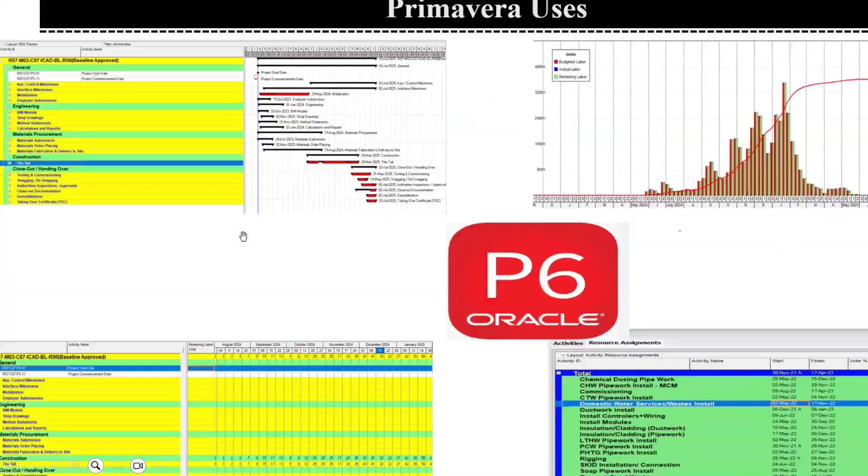Yes, how? For example, you can see this is our Primavera screenshot. Here you can see all the project breakdowns: engineering-wise, material-wise and construction-wise. And this is the month, this is our peak curve per week, how much percentage you have to achieve. These are our peak curves.

And you can see this is the man hours. So per day how much manpower we need. For November how much manpower we need, for October how much manpower. All these, 25, 29, the manpower we need on these days, will be shown here.

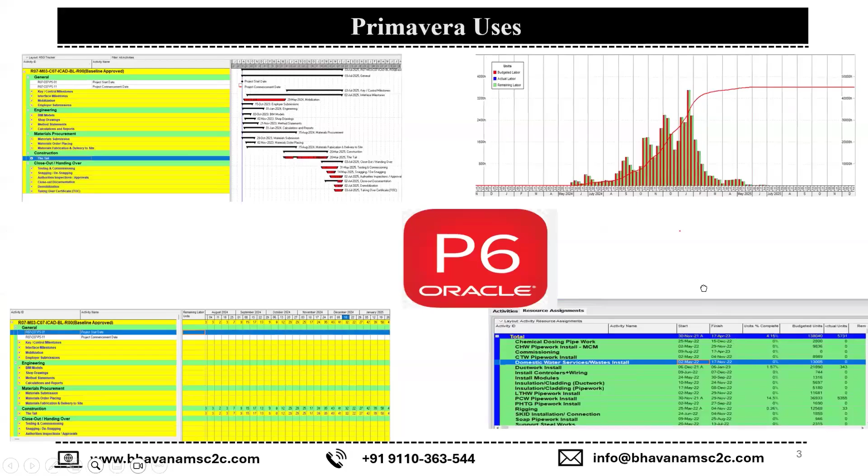And if you see, this is the material quantity. I told you, right? These quantities will be extracted from the BIM. For the chemical dosing pipe work, we need this 2800 running meters. And for the domestic water supply line, we have to do 13,005 running meters. All these quantities we can extract from the BIM and import into Primavera easily. We don't need to break our mind in this area.

If you don't have quantities from BIM, you can approach the quantity surveyors in the project. They will support you and give you the quantities for each and every line item of the activities, and you can import it. So from this Primavera, whatever details you want, minute-wise, hour-wise, day-wise, week-wise, month-wise, year-wise, you can extract the data.

For example, in your company, your management asks, Kabilan, if you don't mind, can you please tell me which month we need the painters for this project, and how many people you want in the month? After receiving the instruction, I will not break my mind. Okay, no problem. I will open my Primavera and see when my painting work starts. Maybe it will start in September and be complete in December.

Then I will say, sir, our work starts in the month of September. So for the initial kickoff, I need five painters and five helpers for the first month. The next month I need 10.

Then I will give the detailed schedule, extract it from Primavera, cut it, and paste it in the Excel sheet, and submit it to my management, so they will arrange the manpower accordingly.

So these are all the roles and responsibilities. As a planning engineer, we have to arrange the engineers, laborers, everybody who is required for this project, on correct time. We have to arrange these things for our project.

As a planning engineer, our roles and responsibilities include making arrangements for all construction materials, managing the cost in the project, using the cranes in the project, and arranging the machineries in the project.

It is also our responsibility to show the progress to our client, because we are all working for others, so we have to show the progress to our company MD or GM or project manager, or high level people sitting in the US or UK. If they are monitoring the project from there, we have to explain how the project is going on, so that it will be helpful.

As a planning engineer, we have to communicate with the BIM team, the procurement team, engineering team, manpower supply team, safety team, construction team, testing and commissioning team, client, contractors, and subcontractors.

As a planner, think that you are the head of your family. If any function is happening in your home, like your marriage or your daughter's or brother's marriage, how will you be involved in all the activities, how will you take charge of all the activities, and how will you monitor it? Same as planning engineers, we are the head in the project.

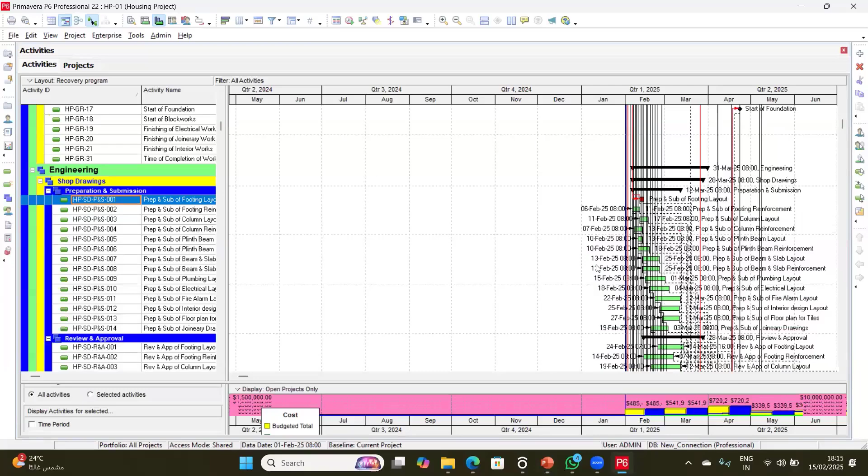Okay, so I will show some of the examples in Primavera. This is one of my planning software examples, from one of my Primavera classes which my student took.

You can see all the approvals we have to take from the government authorities, and this many drawings we need for this project, and this many materials we need - like concrete approval, steel, the material, paint, tiles, doors, windows, ventilators, everything.

And we need the materials purchase orders, material delivery - these are the construction activities. And all these activities lead to project finish. The project start is from here - the first of February 25 the project started, and the 21st of October the project finished.

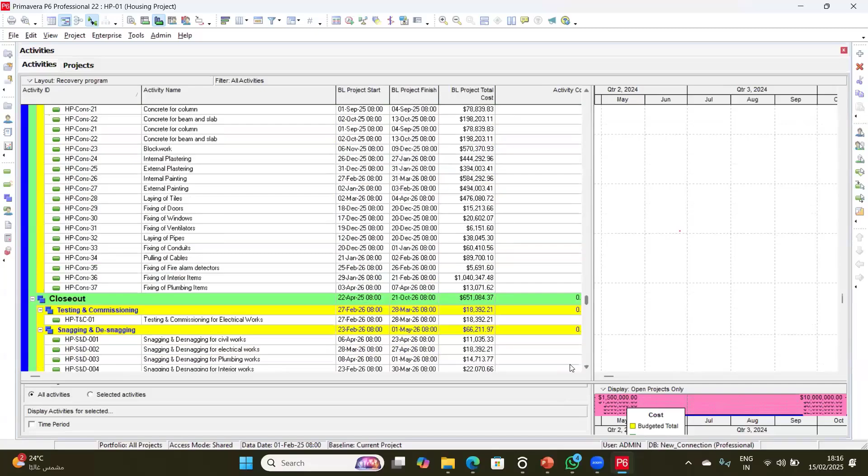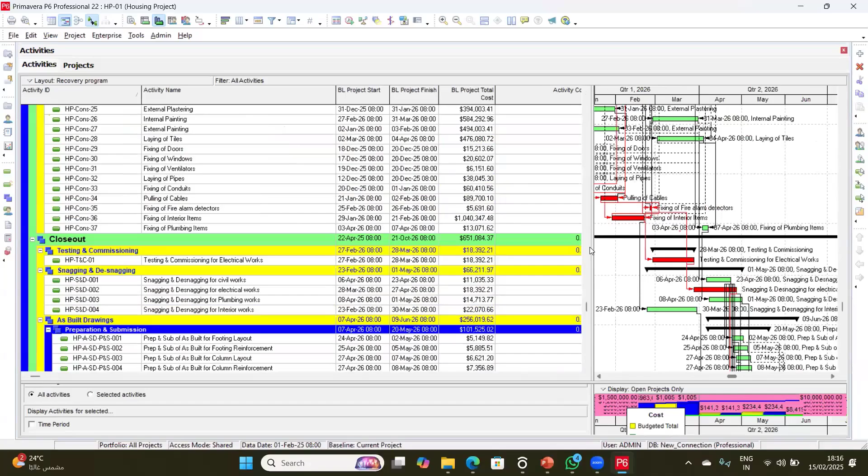This is the detailed activity. You can see the schedules here. So you can also prepare this type of Gantt charts to know when the project is going on.

So I told you in terms of cost-wise we can see how the project is going on - yes, I will show you here. If you see, these are the materials which are all available in this project, and I extracted this from the BIM and imported it here. For example,

in this project, if you need the reinforcement wise - okay, reinforcement wise, see, per week, so now this is month wise. If I need the day wise, I can change this into day wise. If I'm going to change it into day wise and apply here, you can see - now you can see here.

So per day, how much metric ton of steel we need to use - it will reflect for us. So in a minute I will check this filter, units, filter options, anything. Yes, it was divided by 300. Okay, apply. Yes. One minute.

Every day we need to use like 2 metric tons of steel. We need to work on an everyday basis, and here we need more quantities. If you want the steel shuttering wise, day wise, you need like 40 square meter per day, 45 square meter per day.

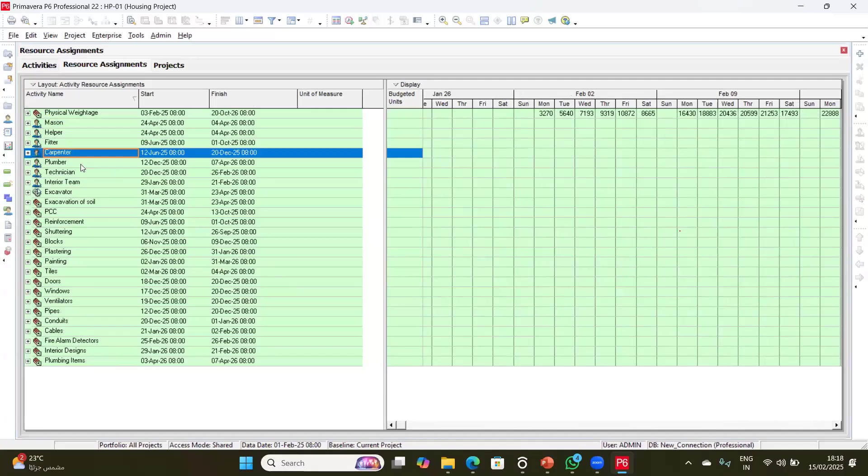And if you want the cost, you can see the cost here. This is the overall project cost, and this is the project cost per day. We have to achieve this much cost in the project. In terms of manpower - mason, helper, fitter, carpenter, plumber, technician, interior work designs, excavator, machinery wise - everything we are able to see from this graph.

If you want to see the graphs, you can see the graphs from here. For example, if you want to see these graphs, see, these graphs will show how this project is going on and how it is progressing.

You can see the graphs from here, and you can extract this quantity from Primavera to Excel, and you can do whatever integrations or analysis you want.

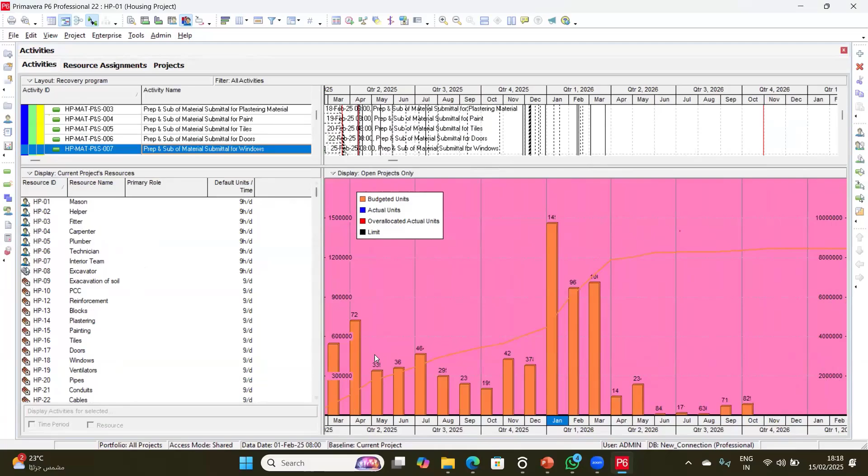Based on these extractions, we did some S curves. You can see this is our project S curve. These quantities are extracted, and all the S curves are prepared from this.

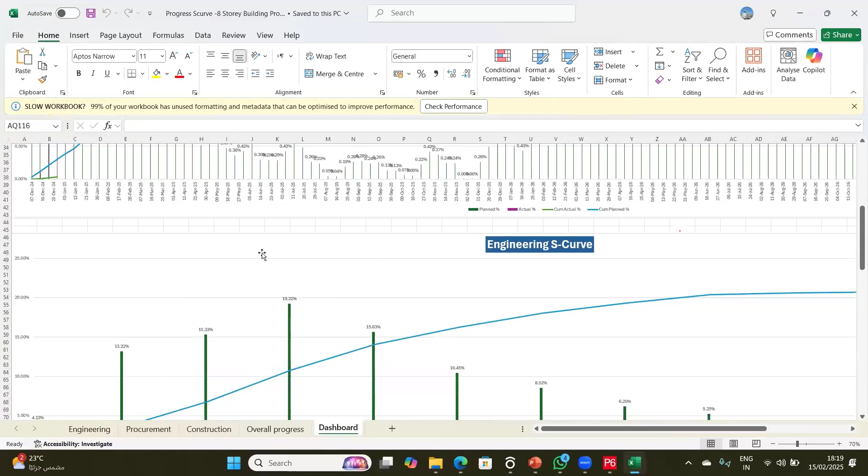You can see these dashboards, prepared from our Primavera S curves. We daily see day wise how much percentage we have to achieve. Everything you can do here - engineering wise, shop drawing wise, per month, per week, how much you have to achieve, and in procurement, construction per day, how much percentage you can achieve. Everything you can extract from here.

Here, this will be a planned versus actual curve. This is the planned cost, and this is the planned percentage. This is actual. Everything will be taught in this Primavera detailed classes, so you can understand from where we started.

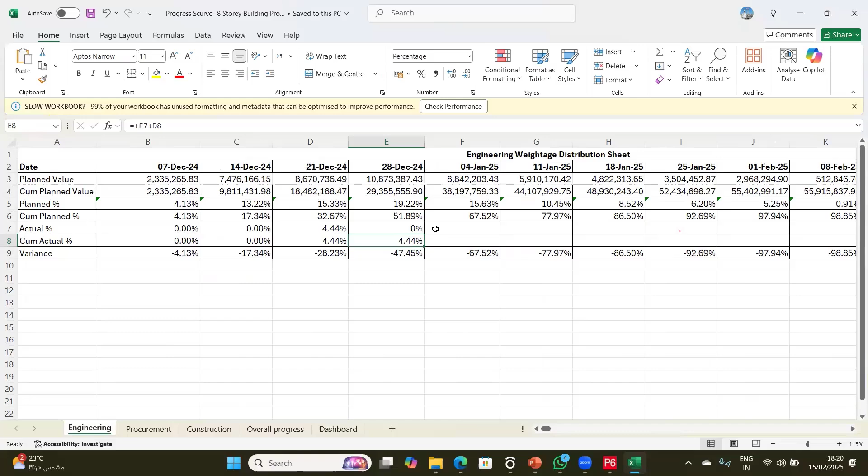So if you are doing this... okay, okay, no problem.

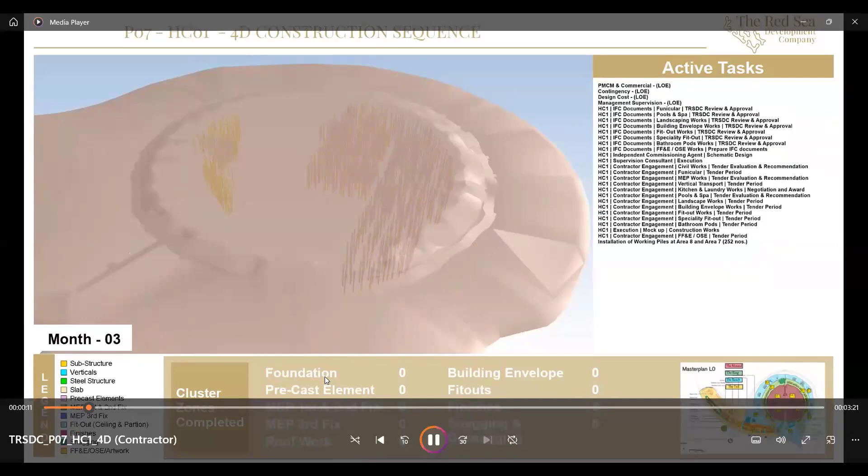This is my project, just like a 3 minute video. You can see this is the output of your BIM and your Primavera P6, Navisworks, Synchro 4D, BIM. Everything is integrated. This is the output for you. See this video fully. You can understand how this project is going on. On the right side you can see the activities are going, the contractor engagement, all these things.

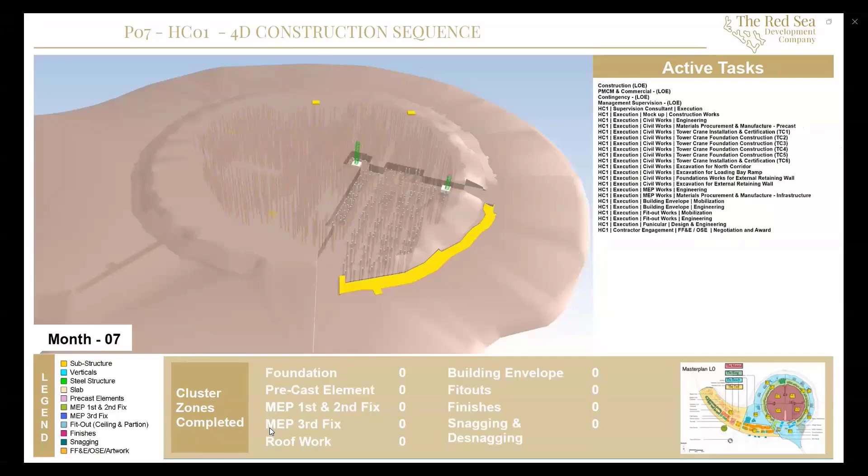So parallelly they are going. Here the work is also going. So the piling work was completed now. So next month they are going to start the tower crane erections. Yeah, they erected the tower cranes, and they started the works in parallel in these areas, and now it is going.

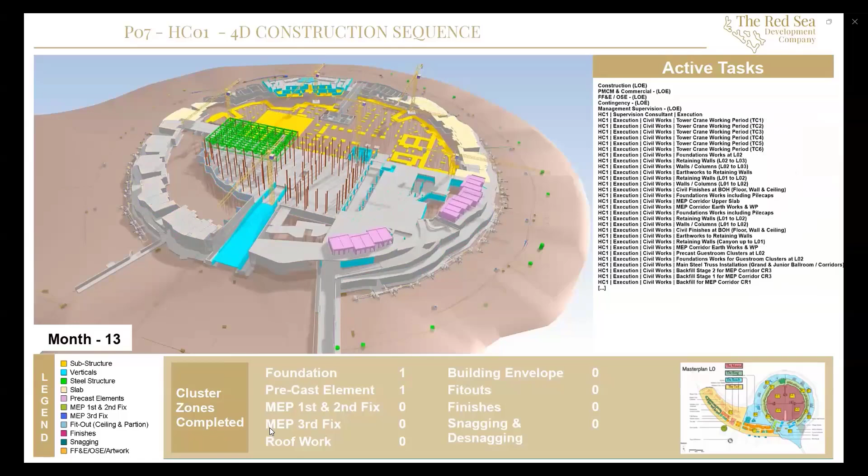This is the current project I am working on in Saudi Arabia. These are the steel structures, all these are steel structures. All those things will be imported from AutoCAD and Revit and Navisworks. Day to day, we are watching these videos, and if we have any doubts, we take it from this reference and solve these issues. Because of this, we are saving much time as well as cost and rework. So this is the one. Floor-wise it is getting increased.

On the right side, you can see the civil works, the works are going continuously on the screen. You can see text-wise the primary activities are going.

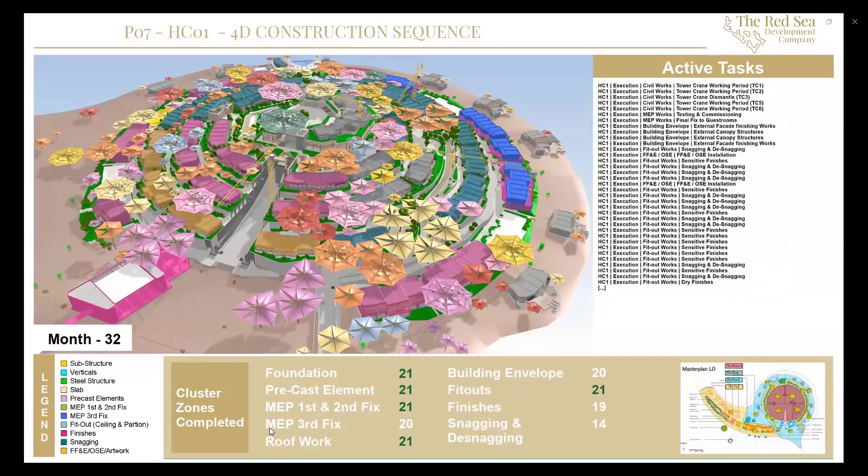So the project is in the end stage. Now 32 months are gone. You can see the timeline also, month-wise, and the snagging and desnagging, final. So when you are completing the softwares, you can do the same as well.

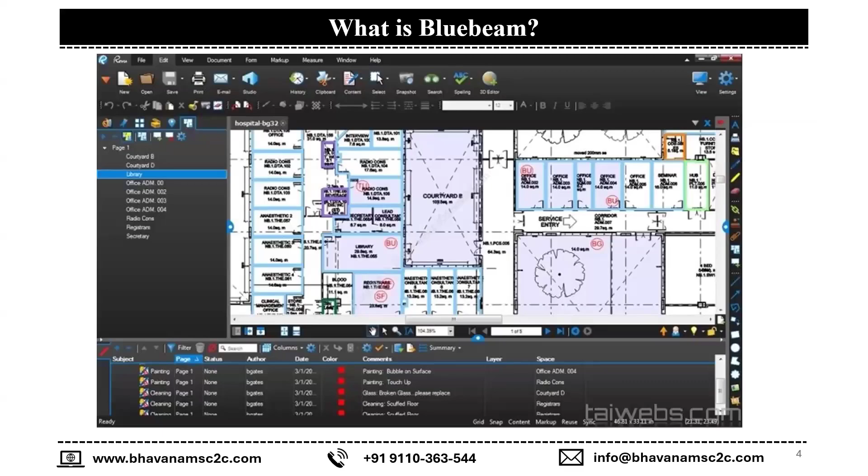Key uses are reviewing and marking up PDF documents, collaborative workflow, real-time commenting, and document management and tracking. So Bluebeam is that effective. It's not that clear an image, but I do have the software, so I'll show you there. It is an older version here, but you can see we have a lot of tools in Bluebeam. Let me go back to my Bluebeam screen. Are you able to see it? Yes, sir. Okay, cool.

So this is the latest software that I have downloaded, and this is the interface. I'll quickly give you a brief about the interface, I will not go deep. Here you have the Review option, and here you have different profiles for whatever you want to do. If I change the profile, it will change accordingly. Whenever someone makes a comment, we have tools to manage those comments.

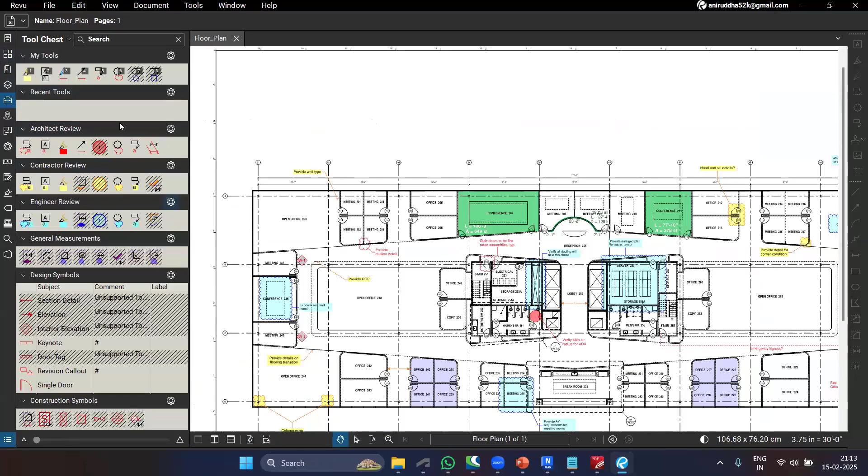These are the tool chest. We will be using these many times to do the markups or comments. If I want to do some revision or add some clouds, and some organizations have their own standards, you can add those standards here. So each time you don't need to draw a rectangle.

For example, if I draw it, I can save it to my tools, so that I can use it efficiently whenever I want. Okay, that is one of the uses. But more or less you will be able to create details also here. Okay, so you can see the section.

If I want to cut a section, maybe I forget to mark it here and it is not showing in the drawing, we can add it right here. Okay, so that also we can do. We can add so many symbols and everything. That is all about the comments.

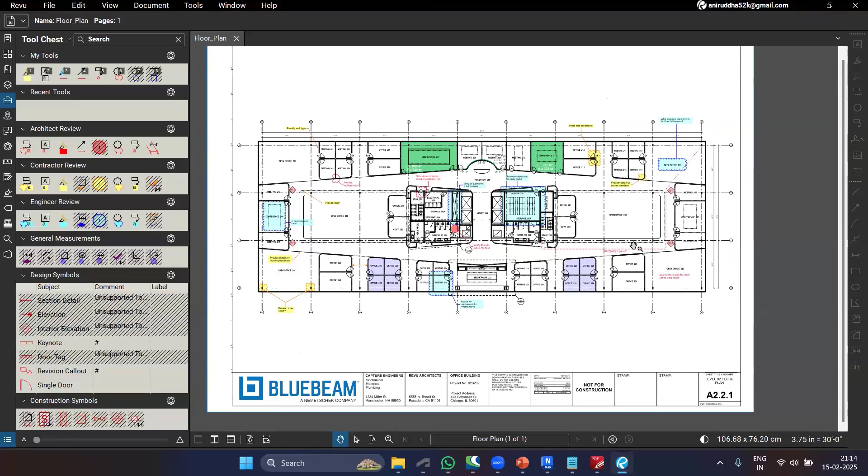Okay, but one more thing we do have here, that is this Bluebeam Studio. I didn't work with so many tools. Bluebeam is the tool that in my company we are using, and we do have this option there. So whenever we are going to submit the drawings, and let's suppose we are doing IDC or IDR, that is internal document checkup or markup, that time we will definitely use this software.

So all other disciplines will come together and start commenting on it. And how they are doing it is by using Bluebeam Studio. That is where we are using actual BIM. So you are doing some collaboration with all other people, with all other disciplines. What BIM is, it's a collaborative process which we do with all other disciplines to efficiently manage the project workflow. Okay, so it's a basic term.

So this is, I think, the key use of Bluebeam when it comes to markup. Before that, we do have other PDF tools. You can comment there, but it's not collaborative. Let's suppose I save this PDF and give it to someone else. That will not work because everyone has to see who commented. So we have so many tools to see here who did the comment, how and when he did the comment, and what the comment is.

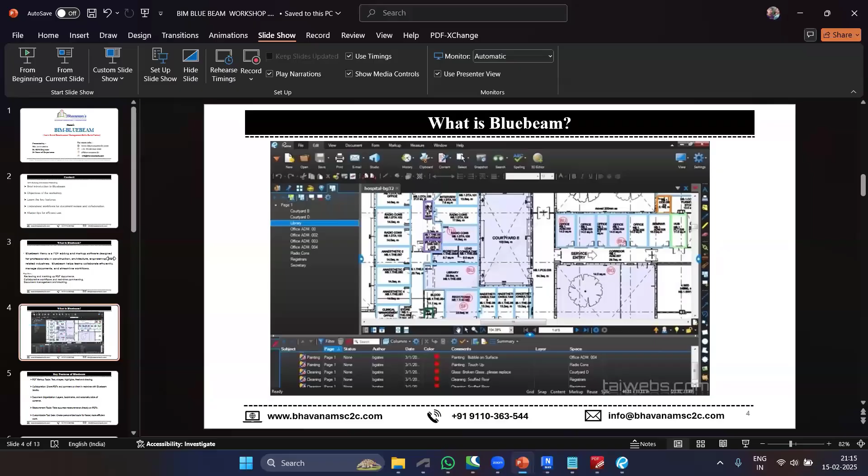So that is the thing that Bluebeam specifically has for people like us who are using BIM to do this process. Okay. So yeah, that is the basic interface of Bluebeam. So now you understand what Bluebeam is. It's not just any other tool that we are going to use in our industry. It's a very specifically designed tool to do our work more efficiently and more collaboratively. Okay, cool. I think it should be clear.

Now let's go to some key features. So I have shown you the PDF markup tools. We have a lot of tools, and it's not just limited. We can create our own markups, or we can create our text, shapes, whatever we want using these PDF markup tools that I have shown you in Bluebeam.

Then we can do the collaboration: we can share and comment on the PDF in real time. This is very important work when it comes to real time. That means we are doing some collaboration. If you guys are aware of Revit, there also we work in real time, like we collaborate at the same time while we are working. There is the option to sync and so many things. When you start to learn this software, you will definitely see it.

Then you have document organization: layers, bookmarks, automatic table of contents, and so many things. That is also there. So here you have this bookmark option. You can add any bookmark, and whenever you come back and you forget, when you click on that bookmark, it will take you there.

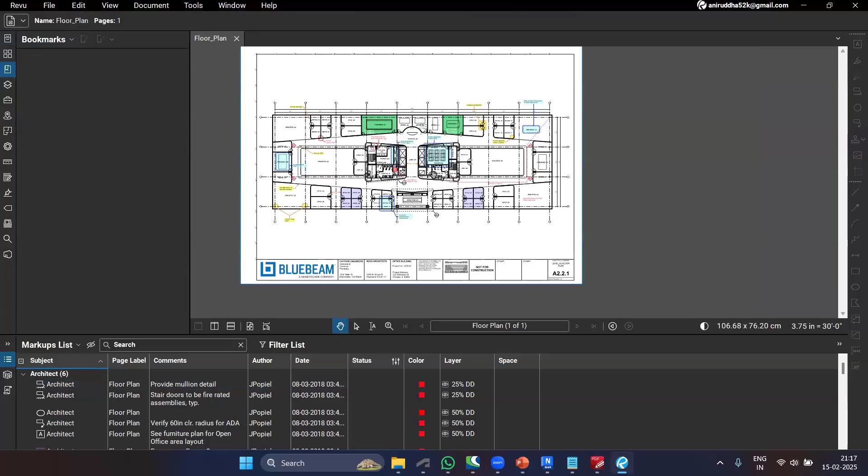So for example, this is the area. Currently I don't have this feature available right now, but for example, this is the area I have zoomed in. If I created a bookmark, maybe I'll go to the next page, or maybe I'm zooming out, but when I click back on that particular bookmark, it will be directly zoomed into that portion. That is how useful this tool is.

And one of the unique tools that I have seen when I started using Bluebeam is taking accurate measurements directly from the PDF. So, what does that mean? That means, for example, I'm not sure if that tool is working here. Protected scale.

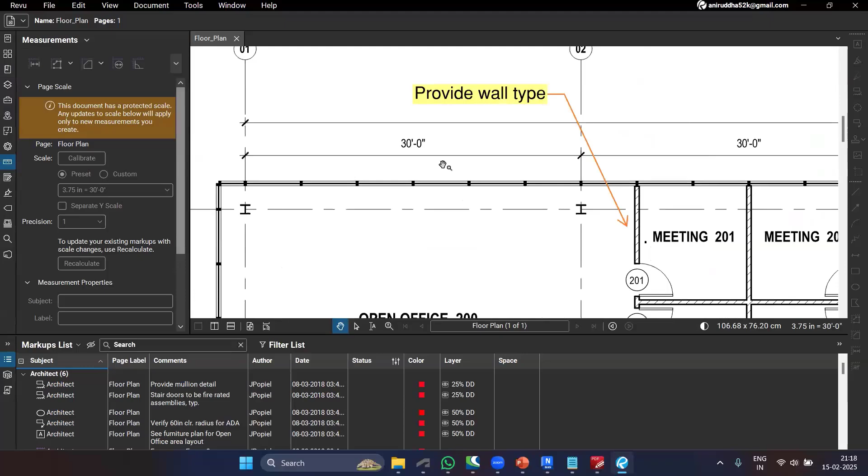Okay, I don't know, something's wrong with the document, but it is. So it is 30 feet. Well, right, we can see it. But if I want to measure some other dimension, for example, from here to here, we don't know the scale of the drawing. Let's say, I'm not sure, is it mentioned here? So even if we don't know, what we can do is click on this calibrate.

And we will select this point to this point. We'll enter this distance as 30 feet. Okay, we'll just give that command. So, for example, it's 3.75" equals 30 feet. And when I use this same tool here, it will give me the accurate length of this area or the line. Okay. So whatever lengths we have, it is fine because that should be in the drawing, right?

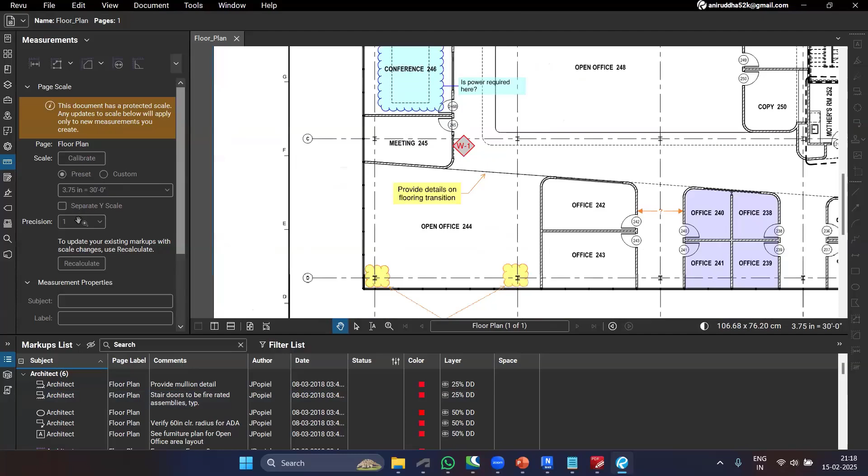But so many things are not in the drawing, for example, from here to here, we don't know. So for that also, you can use the Bluebeam software to get to know that length rather than going into the CAD or that particular software to see that length. So you can measure it directly from here. When we start the course, we'll definitely go through it very deeply, like how it works and how we will make use of it.

So this is also one of the important key features that Bluebeam has. Customizable tool set: create personalized tools for faster and more efficient work. What I have showed you is here. So this is the tool chest. You can see here, by default it has architect review, contractor review, engineer. So everyone has their own standard to review the drawing. So if I'm using this, the other guy will definitely know this comment is from the architecture discipline because it is in there.

For example, currently my company has their own profile made. So you can add a new profile or create your own, and you can save that particular profile and name it, and once you name it, it will be visible, and you can use that tool chest while working with Bluebeam. Okay, cool. All right, so that is this, and let me go to the next slide.

Sorry. All right, customization options. There we have toolbars, profile. I have just shown you the profile, how we can change the interface. So let me show you by clicking on it how we can change the interface of Bluebeam. Currently it is set at Revu. Let me take it to Revu Advanced. It will change the interface accordingly. It will take out everything and just give us this interface.

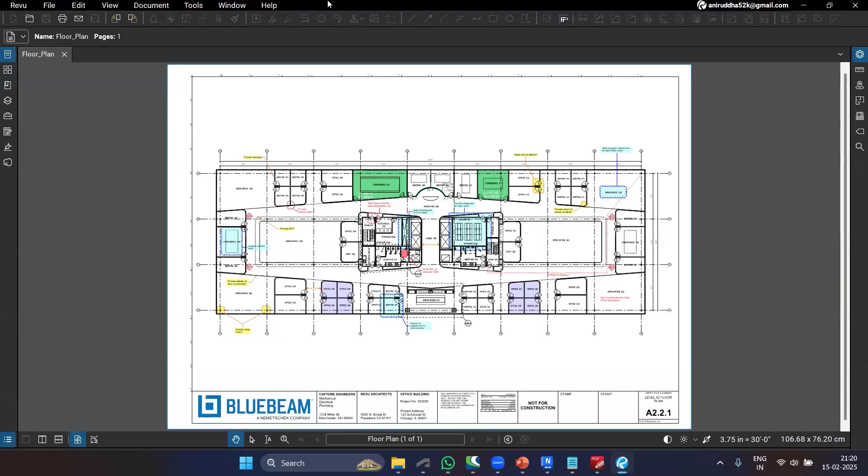You can change to whatever interface you want. Again, we come back with some new interface, and like that we can change. So this is the interesting thing we can do. For example, you are working with some organization and you are the person who oversees all the documentation work. You can standardize this, and once you standardize, every other discipline can use it to make the work efficient and standardized as per your organization.

We can create shortcuts. You can create a shortcut to speed up your work. Mostly we don't need it, but shortcuts are really important, like if I'm teaching you Revit, because when you're working you may have thousands of drawings on which you have to make comments. So each time you cannot go like this, click and then paste that particular thing.

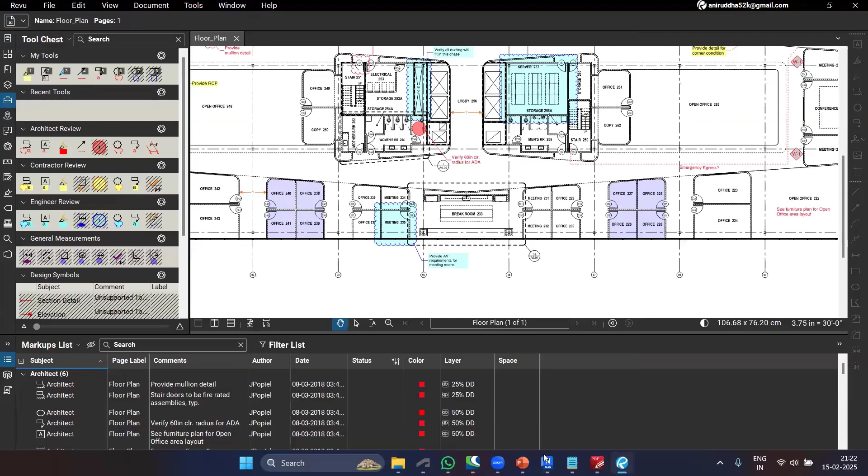So if I set up some shortcuts, from here you can select any shortcut you want. And if you use that shortcut, it will appear directly. For example, text, sorry, I don't know why it's not working, somehow I have some license issue. So you can select shortcuts you create on your own. Maybe you don't like some existing shortcut and want a customized one, so you can use all those shortcuts while working with Bluebeam.

Then you have interface tools. I have just shown you the tool chest, markup list, and properties bar. Okay.

So yeah, opening files. There are so many things you can do with Bluebeam that are next level advanced.

So for example, what does it mean by how to open multiple files? Let's see, I have a list of PDFs in my folder. Currently I have this LOI and some other things with me. If I want to use this in Bluebeam, you can see combine files in Revu, convert files in Revu. If I combine it, it will give me the combined list of all those documents. I'll not open it because it's personal, but we can open all the documents in one document and save it as that document.

Before this, maybe you guys know iLovePDF or some other online tools used to combine files or get a combined PDF. But now in Bluebeam you can do it in one click, it's just an easy task. So when you have a thousand or 200 PDFs you want to open, you can open them right away, one by one, or combine them and open it. Mostly we combine them because we have a list of drawings and we don't want to shuffle them.

For example, here is a floor plan, then here is a ceiling plan and so many other plans. I don't want to open it randomly - it should go from the floor plan to the different general arrangement plan, stuff like that. That's something we can do.

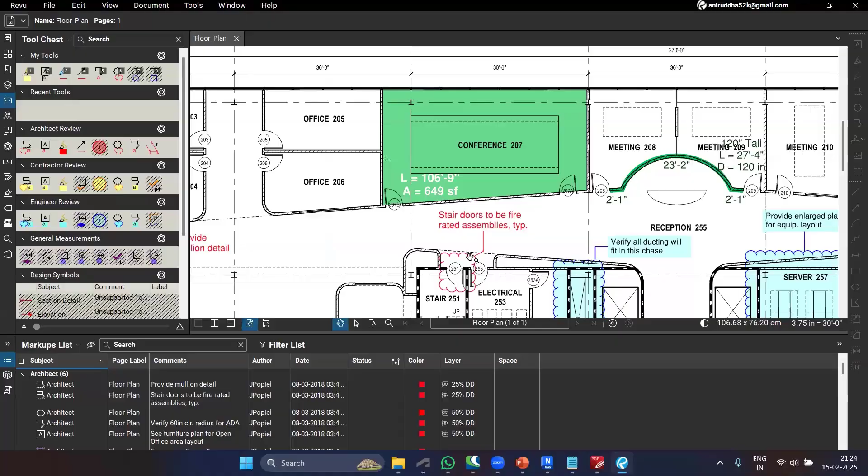So this is the markup I have shown you, already marked here. These all verify all ducting, and these are groups. Whoever commented made sure it should be in a group, so we don't mess with the comments - we have a habit of moving things apart. So if you don't want to move it, you can create it as a group.

You can do adding and removing pages - that tool isn't working for me right now, but in the document, at the end I'll definitely give you one example where you'll see how that works. And you can organize the layers and manage the visibilities, which you can do from the layers part.

Here is what Bluebeam Studio is. Bluebeam itself, if I remove the Studio part, is the PDF editing tool with a lot of features oriented to the construction industry, but it's not that useful by itself. What makes it useful is Bluebeam Studio. So how does that work?

Let's say architectural, structural, and other disciplines like landscape are working together - landscape people create their own drawing using architecture reference, structure reference, and all other references. So everyone can go there, review all the drawings, and do their own comments. It's really easy to track changes and communicate effectively.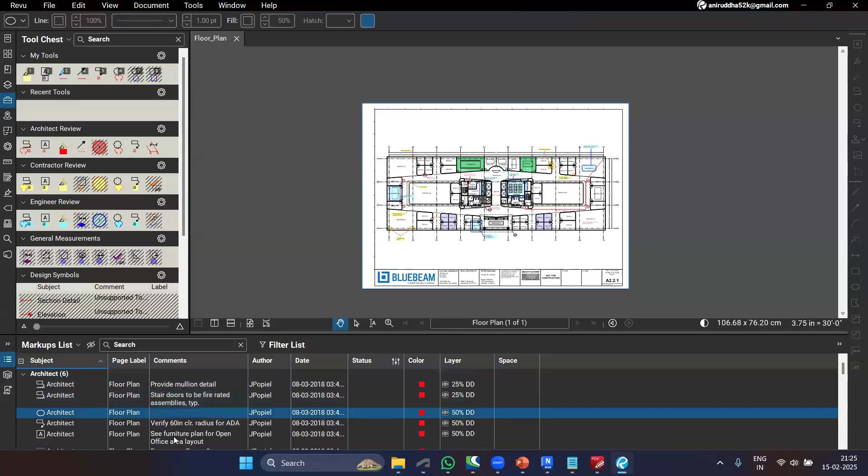You can see when someone has commented on this PDF, their name is visible, and that comment is also highlighted. You can see it's the architect, and he put some comment, or you can see it's the contractor's comment - every comment is different. You can see the discipline, the page label showing which page this drawing is on, and you can see the comment, who did it, and also the time. That's how it becomes collaborative.

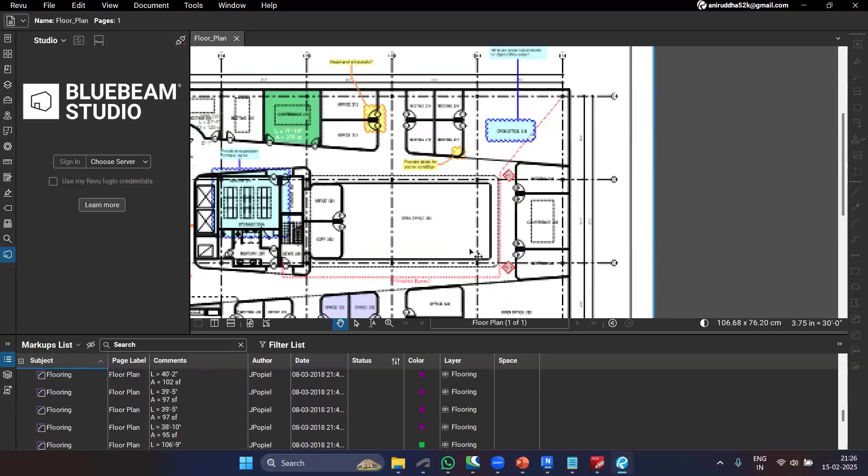For now it's offline, but you can make it online. So if I start using this, all the architects, contractors, and other engineers come together and start putting their comments. If they didn't understand something, they make sure they understand it, or if they want some changes in the drawing, they can simply do that. That's how it works.

There are sessions we can create in Bluebeam Studio, which help others join that particular session, the way we joined this Zoom meeting, and they can start doing comments on it. We can share documents with stakeholders. This is the toolbar which I've already discussed - we have batch processing, we can do calibration like I already showed you, and we can do estimating. There are so many things we can do.

Okay, so we will come to the case study. I think we can include this thing. So, one day in my organization, we had this issue.

We faced this issue. I'm not sure if you guys know the DiRoots or not. But when you're learning with this BIM thing, that time you will definitely be using it.

But let's suppose you don't have the DiRoots, so you have all the sheets with different names, because when Revit starts exporting and you try to combine it, how will it be splitting the documents into multiple sheets. That time, this Bluebeam tool is literally helpful.

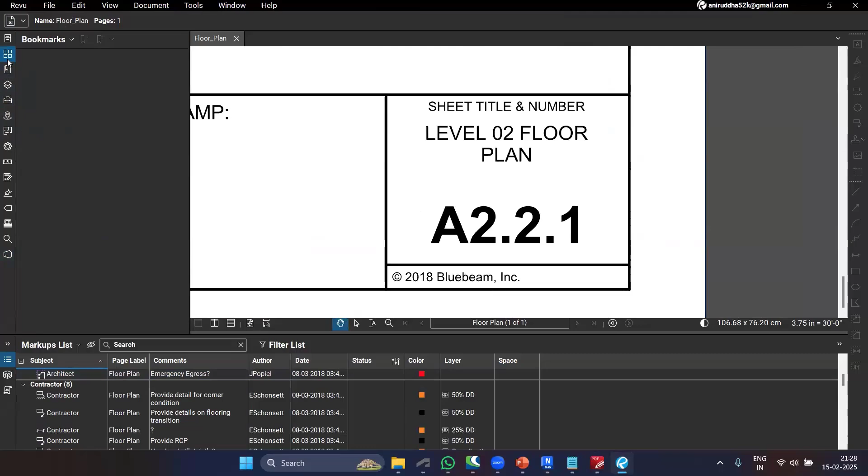So for example, I can use this as my final reference and I can add it. Let's see if I can. Okay, it's not working for me somehow. But when we start this thing, it should work.

However, if I take this as a reference, let's suppose this is changing for A2, A2.1. For the next drawing it will be 2.2, and maybe after some time it will be 3.1, 3.2, 3.3. You can't save it one by one.

If I try to do any renaming tool, it won't work because it will take a lot of time. I have thousands of sheets, it won't work. So what we did, we just used this thing, and now it is reflecting this.

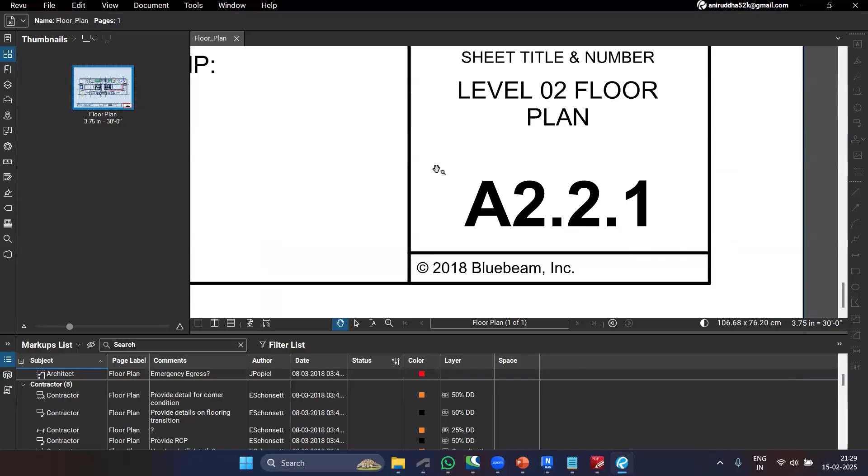We use this tool to create a page label that will appear something like this. We select the page region, select that particular thing, select it here, and it will reflect this. Let's suppose we have thousands of drawings, we don't know, but it will take this portion, read the text, and give that particular page label as a number.

And then you can see here we have an extract pages option. So what it will do is extract all the pages with their respective drawing names into a specific folder. So you can see it will save you a lot of time.

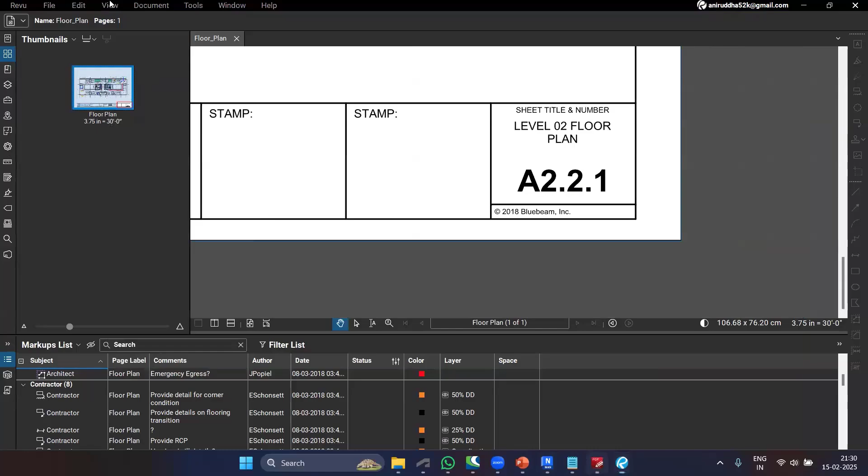You can't do it in this PDF editor, can you? I don't know, I have used it, it won't work here. Since that time, I have started using this Bluebeam tool very effectively in my organization.

So that's all about the Bluebeam related to the workspace and the tools. How does that help in BIM? It's not just a tool, it is literally helping us make our BIM workflow efficient. So, hope I have explained and given you a brief about Bluebeam. Let me know, guys, if you have any questions related to Bluebeam so we can discuss it.

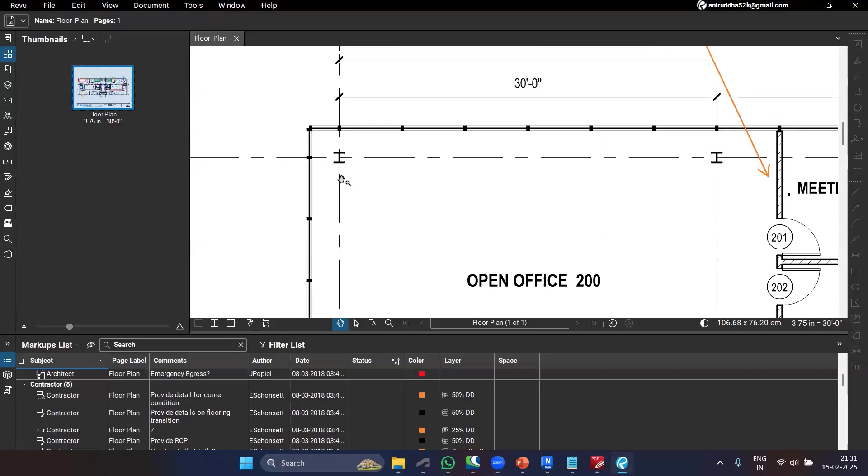No, you can't do that because it is the product. This is the final product, the particular output that you want. You can do some add-ons, but you can't change the exact plan. If I want to hide it, I have tools to make it hidden. We can do that, but it's not like you keep moving it here and there—it won't work, because that should be reflecting in your model as well. Whatever drawing is coming, I think it's an architectural drawing, and it's coming from the model. So whatever you want to reflect here should definitely reflect in the particular model from which you exported this plan. It's the model entity—you cannot just edit it here.

Thank you. Any other questions? Yeah, hi, Aniruddha, this is Kabilan here. Hey, hi Kabilan, I have one doubt. Is this Bluebeam software useful for as-built drawing preparations? We can use it for that as-built preparation.

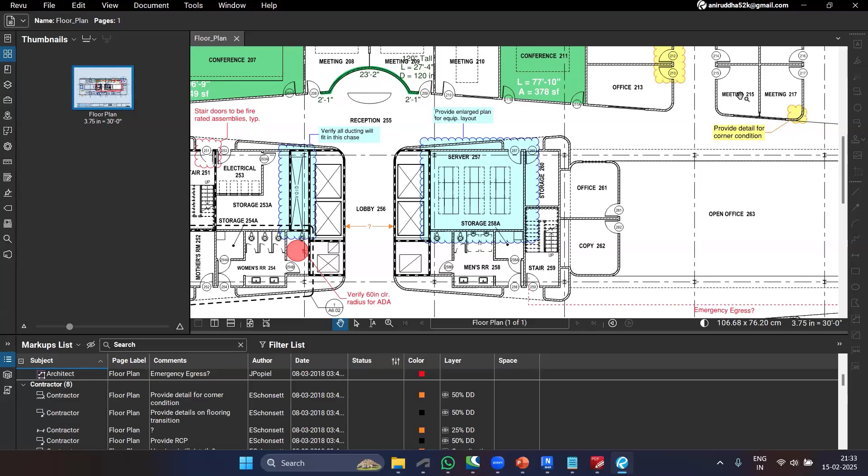As-built, like what? For example, as per the approved drawings, due to some issues with the MEP contractors we are unable to fix our detectors or our works, so at the site condition we are doing some changes. That needs to be reflected in the drawings, so when we are raising our work inspection request, they need the red line drawings. So for that purpose, can we use this software?

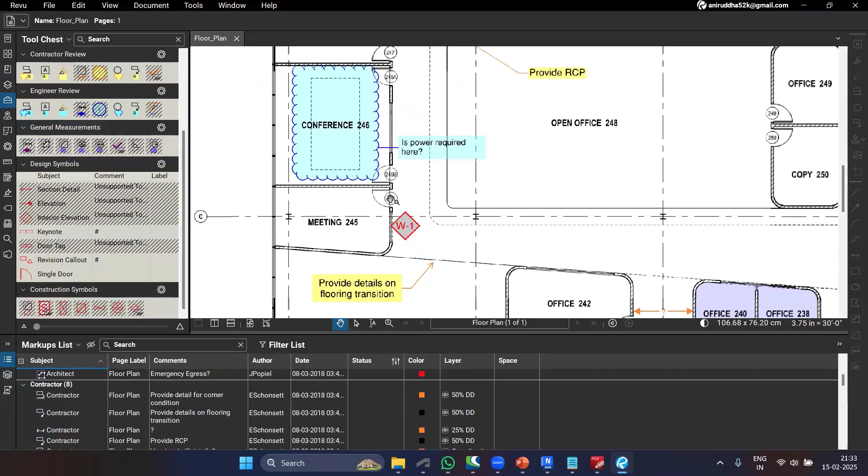Not sure how—yeah, yeah, we can definitely create the particular detail if, let's say, some detail is messed up. So this door is not correct, so we can just simply use the tool set. You can see the single door, you can add your own door, or create your own like door and a cloud symbol, you can mark it as revision one. Exactly, you can do it, but that is just for the purpose of reflecting it. At the last, it should reflect in your original model or whatever the CAD is. Yes, yes, I understand that.

So first, the first stage we definitely do have to extract it from the BIM, and we work on site. Due to some work and site conditions, something we need to change, and that change needs to be reflected in this drawing. And at the final stage, we have to hand over this drawing to the BIM guy, and again he will reflect it in the model. Yeah, perfect, perfect, that's how it works. Okay, go ahead. Okay, thank you.

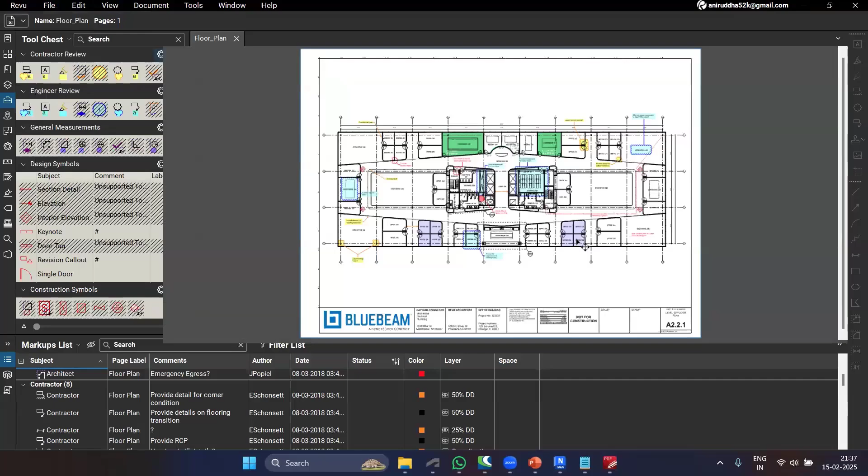Yes, we can. I didn't do it because I don't want to make extra promises, but this is the quantity takeoff, and yeah, we can do the quantity takeoff in Bluebeam. While learning, I'll definitely learn and teach you, because mostly it's a PDF editing tool. So we didn't go for the quantity takeoff. We have some extra tools for that, so we don't go with Bluebeam. In Revit also, I'm already getting a quantity takeoff, so I'm not going with Bluebeam.

Okay, so mostly we use it for the drawing comments. It's mostly arranging the drawings, managing the documentation, putting the comments, back checking the documents. For all that purpose we are using Bluebeam in my organization. But yeah, if there is an option, we can definitely do the quantity takeoff. So thank you for your question as well. It's literally an interesting question.

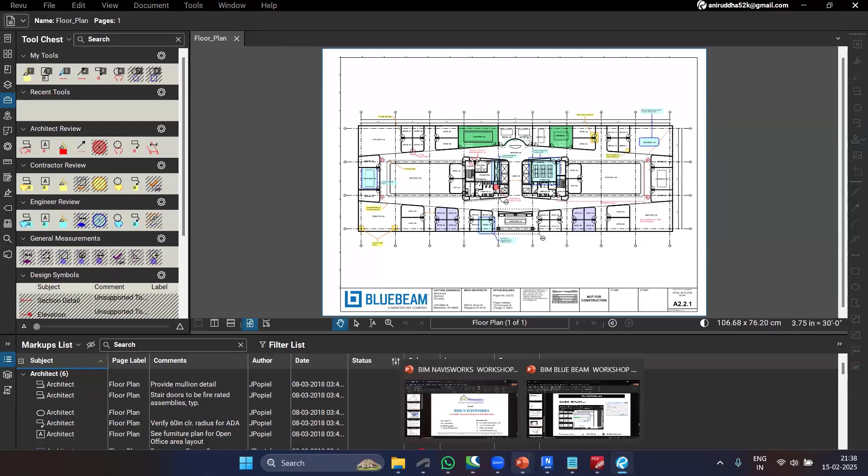Sharad. Okay, so if you guys still have any question, just put it into the chat box. I'll start with Navisworks. I think we have Kabilan with us, hopefully he's with us. He's a planning engineer as well, so he's good with this planning stuff. Okay, so let me start with Navisworks. It doesn't matter, you guys now know me, so there is no point to introduce myself again.

But again, if you see BIM with Navisworks, how beautiful that looks. So what is Navisworks Manage? First of all, again, Navisworks Manage is not BIM. I am mentioning it's a tool to make our work efficient in BIM. BIM is the process. When you are learning all the tools, you become the BIM engineer. That means when you are learning to collaborate with all of these tools, you have a whole lot of knowledge of all of these tools, and you will become the BIM engineer.

Make sure that is clear, because many times we mess up, like, this is the software, that means this is BIM. Many times I have heard people saying Revit is BIM. It's not like that. Revit is the tool we use to do the BIM process, or to implement the BIM concepts. By definition, it's a comprehensive project review software for building information modeling used in the architecture, engineering, and construction industry. Whenever you hear the term BIM, AEC will come: architecture, engineering, and construction. So it's a project review software.

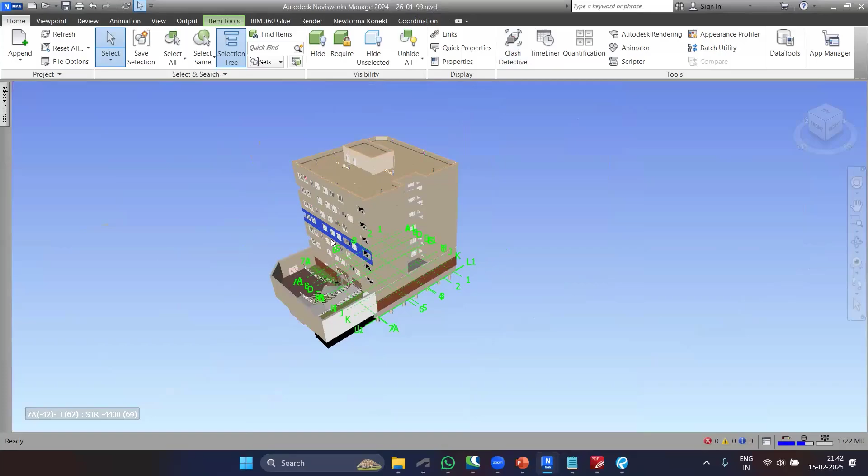Okay, so this is your model. This is the NWD file. Okay, I'll tell you what these extensions are, but for now this is the Navisworks document file. Here we didn't append any model. It's the exact model that is in the document. You have a lot of options: Home, Viewpoint, Review, Animation, View, Output, BIM 360 Glue, Render, and these are the other plugins that I have used in my recent works. Okay, so on the Home tab itself, you have a lot of options.

First, what is Navisworks famous for? Navisworks is mostly famous for clash detection; it is very good at it. So just click on it and see how that looks. So this is basically the clash detection window. Before and after that, you have to do a lot of work. There are prerequisites for Navisworks clash detection that we will definitely see in the course. But in the middle, this is the clash detection window, so you can see how you can detect the clashes.

So old, new. These are the clashes that we currently have. These are two clashes, and these are four clashes we currently didn't resolve. There are options: new, active, reviewed, approved, and resolved. You can manage those things in Navisworks itself. This is the Rules tab, where we can exclude some items, include some items, decide how you want to run that particular test, or add some new rules.

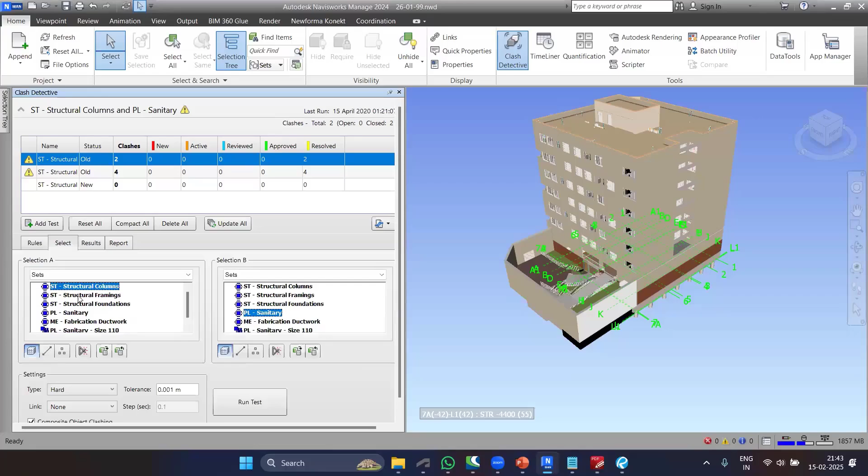Then you have a Selection window. What selection will you be doing? Maybe there are different disciplines: structure to architecture, structure to MEP, architecture to MEP, likewise landscape to architecture, or landscape to structure. We have so many disciplines, and we want to do clash detection for each discipline against the others. So you will be creating different sets. As you can see, it's related to sets. So you can select different sets.

And then you have some settings. If you want to use tolerance, you can. You can change the clash type, how it will be detected. There is also the option Link with TimeLiner, so you can choose that option. Once you did all the settings properly, you can simply run the test. Once you run the test, whatever clashes we have in the model will appear here. So that is how this clash detection works.

Okay, now the second thing Navisworks is famous for is the TimeLiner. Recently, if you noticed, Kabilan, sorry if I'm saying your name wrongly, showed how the activities and project planning go on. You can do the same thing, or do it better. You can literally link the Primavera file with Navisworks and assign all the tasks.

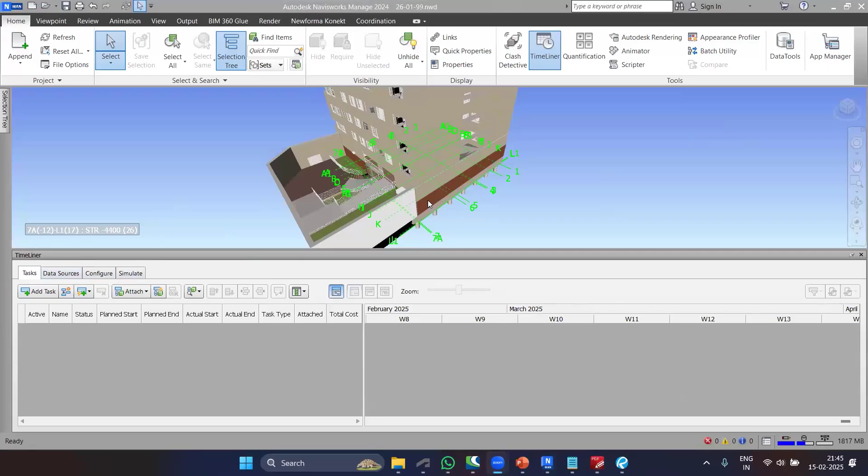So last time, if you noticed, Kabilan showed us one video; we can do that exact simulation here as well. For each element, you can add a particular task, assign that task to that particular element, assign the date, and it will run likewise.

Okay, so there is this option where we can use this. You can see I can add the Primavera P6 file directly here. When I add it, I can assign that particular to this particular task, and it will literally give me the actual 3D output, the way you saw in the last 3 minutes of that particular video. You saw one project.

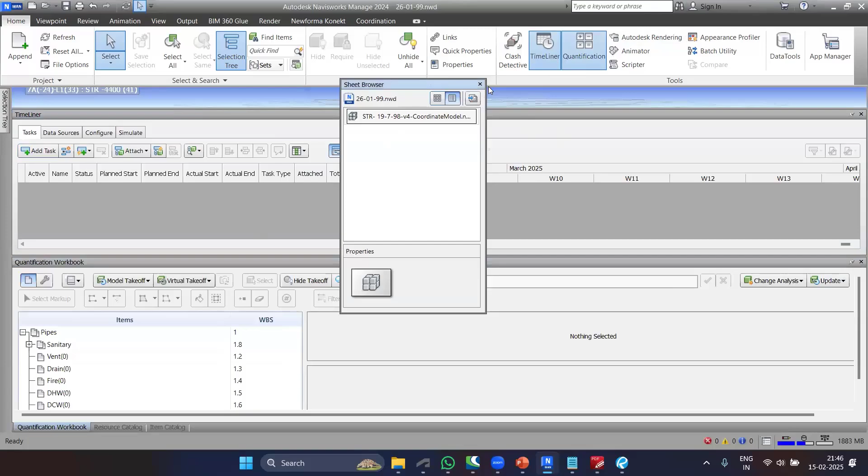Okay, so likewise, we can get in here. So this is the scheduling. For scheduling also, we can use this time Navisworks. Okay. And then we have the quantification as well, for which also we can do this through the Navisworks itself. So this is the quantification workbook. You can create your own workbook. You can add all the items.

Let's say sanitary is there, vent, drain, maybe structural element. You can see it here. There are some columns, some flooring, some railings. So you can do the quantification as well in the Navisworks. And the last but not the least, that is the animator tab.

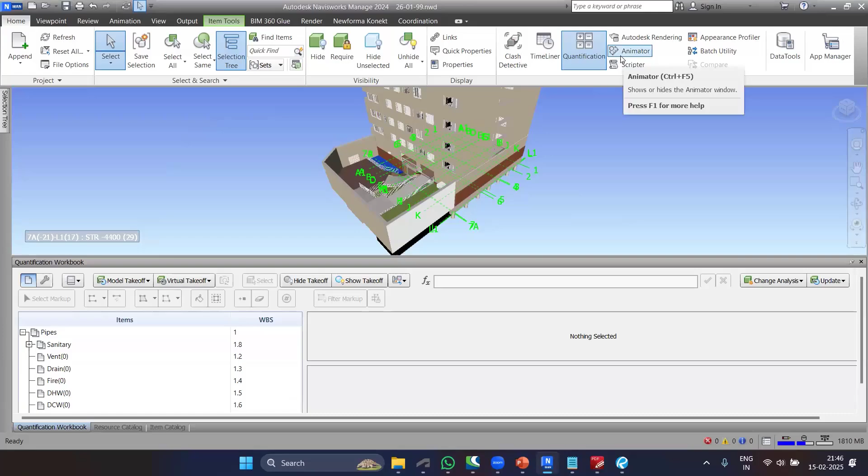Okay, you can create the animation, not that quality animations because somehow it has not that good quality in terms of rendering. Okay, that was maybe the Synchro 4D animation, but yeah, you can create the animation where it will give you on the left hand side the project progress. Okay, the day-wise construction, how these things are going, it can give you also here in the Navisworks itself.

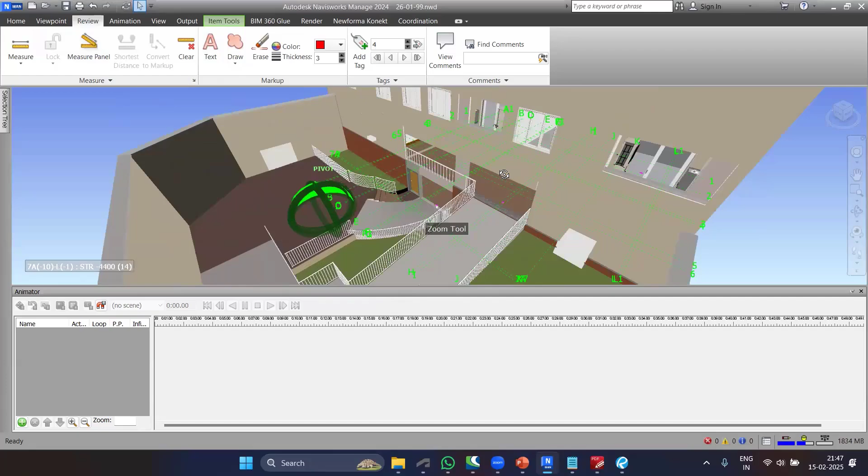Okay. Then the reviewing and markup, that is what we are using the Navisworks for, particularly reviewing it, marking up a particular area in the 3D itself. You have some clashes or you have some doubts in the 3D model itself and you want to resolve that doubt. So you can do that in the Navisworks itself. Okay. So there we have so many major tools.

You can draw some cloud, ellipse, freehand, you can do it there. And you can add that particular view and you can assign that particular thing or you can send it directly on Teams or any communication tool that you have. Okay. So I think I literally went a lot with the Navisworks software itself. So we'll come back to the PPT and we'll see what we have missed and we'll check it.

Okay. So first thing first, I have showed you and review 3D models from the various software, AutoCAD, Revit, 3D, SketchUp. Okay. It's not just specific to Revit only. We do have more options from which we can take the models and we can do the clash detection. Okay. So what does it mean, combined?

So you have different disciplines' models with which you want to do so many clash detections, timeline, maybe some planning or some scheduling work you want to do, but you have literally the different models, which you can combine into the Navisworks itself. Okay. So in Revit, you can't combine the model, by the way, just to give you the highlight. Okay. You can link the model, but it will never be the combined model with you. You can copy and paste the element, but it will not be the different model. But in Navisworks, yeah, you can do that.

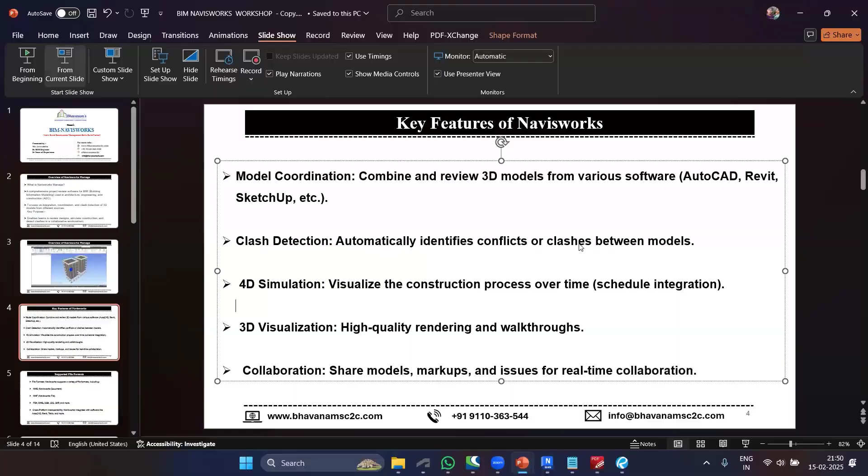Okay, and in the last, definitely the collaboration. Okay, that is the most famous word I could say in BIM, which you can do in BIM. Okay, mostly you will learn this: BIM we mostly use for coordination and collaboration. Okay, so like that. Okay, so Navisworks supports a variety of file formats.

Okay, now there are two extensions. Actually, there are three. I don't know why there is two. Maybe I have missed it. It doesn't matter. Okay. When you are exporting something for the Navisworks, okay, not from the Navisworks, for the Navisworks, it will be the NWC. Okay, Navisworks cache format. Okay, that is not mentioned here. Then there is Navisworks file format, and in the last, when all the model is getting combined, that is the NWD, that is the Navisworks document format.

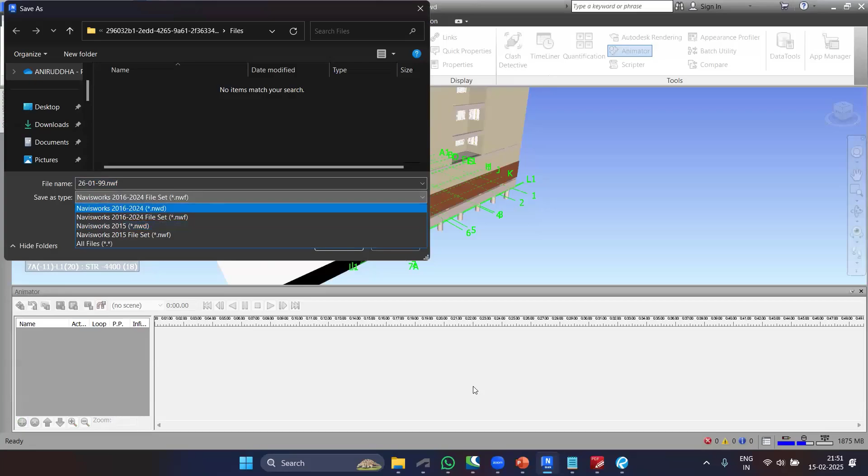I talked just about the Navisworks file extensions. Okay, so let me go back to my Navisworks window quickly, and here you can see it's NWD. And let's see if I do save as. So you can see NWD, NWF. No, NWC is not there. But when you export something from Revit, there will be the NWC format.

So let me try to append something. Do we have anything? No, we don't have anything. But this, if I save as, this is again, okay, let we try to open something and put it on all files. Let's see, or NWC. Okay, see, this is the NWC. This is the file which I have exported from Revit. So that will come into the NWC format.

Okay. So there are three formats which you guys should always remember in the Navisworks. I think you are starting your career, and when you are going for the interview in the field of BIM, if they ask you if you are using Navisworks, the first question they will throw on you is what are the formats in the Navisworks, just give me the extension name. So that is the Navisworks document format, Navisworks file format, and Navisworks cache format.

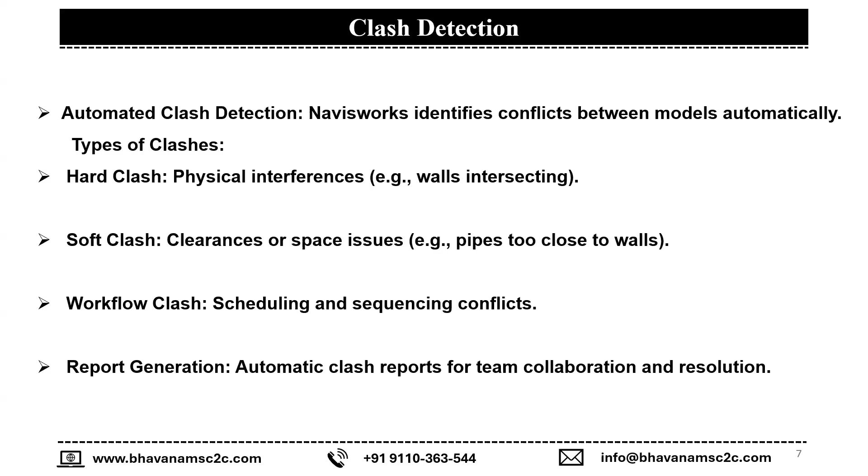Okay, and in the last, you can create report generation. Okay, so you can create reports. 4D simulation and scheduling, that is also one of the, I think, extra stuff that you got in the software itself. That is a 4D simulation, that is the fourth dimension of BIM. Okay, so there are dimensions of BIM. When you are starting with us, that time we will definitely take you through the level of development and the dimensions of BIM, and that is also one of the basic questions that anyone can ask you in this industry.

Okay, so time-related modeling. It integrates with construction schedules to create a 4D simulation. That is what 4D simulation is: how your model is going to get constructed on site with the time. The schedule is the time. When you link that schedule to your 3D model, that means it's the 4D simulation. So you can do the construction sequencing, you can visualize the project using the construction timeline, and you can link the task with the specific model,

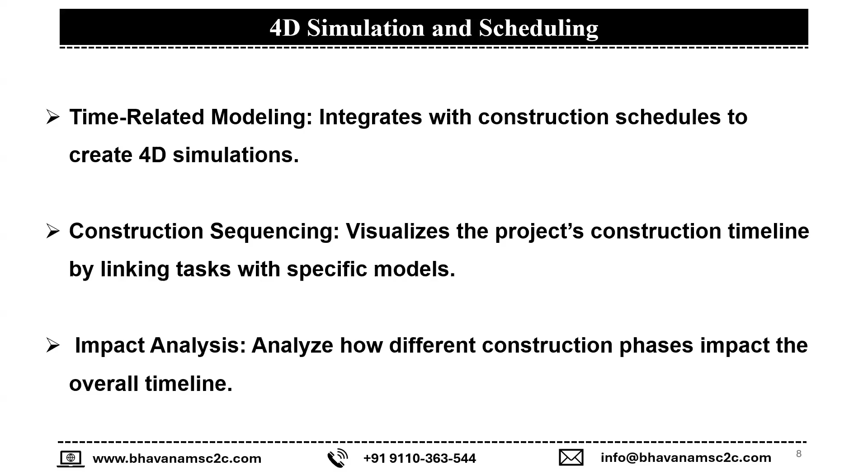and you can do the impact analysis. So you can analyze the time difference or the construction difference over the time. You start some project, you have constructed all the projects, so you can understand the impact, how this is helpful or not helpful to your project.

Now the 3D visualizations. You can create a walkthrough, so you can literally show people how you are going into the model. Even just to view the model, there are so many options. You can show third person view, so you can see this third person come. This is the third person who always watches everything and whom we see a lot of the time. You can use this fly tool, to just fly through the model.

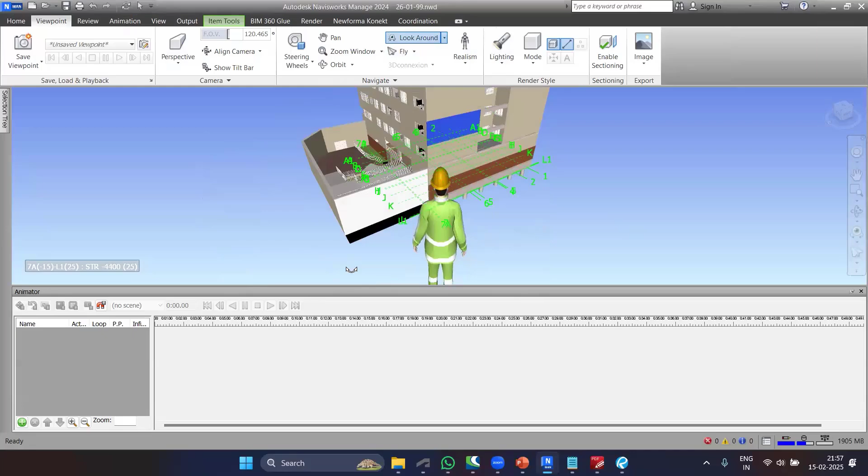Then you can use the look around. Sorry, wait, let me turn off this window. So you can use this look around, this will give you the realism. And then shaded is fine, so you can walk. Oh sorry, I'm walking downwards, so I need to set it. Where is this 3D window? Cool. So sorry. Anyway, I'll definitely go very deep later. Somehow my scroll is also not working. Leave it. So these are the tools that we can use.

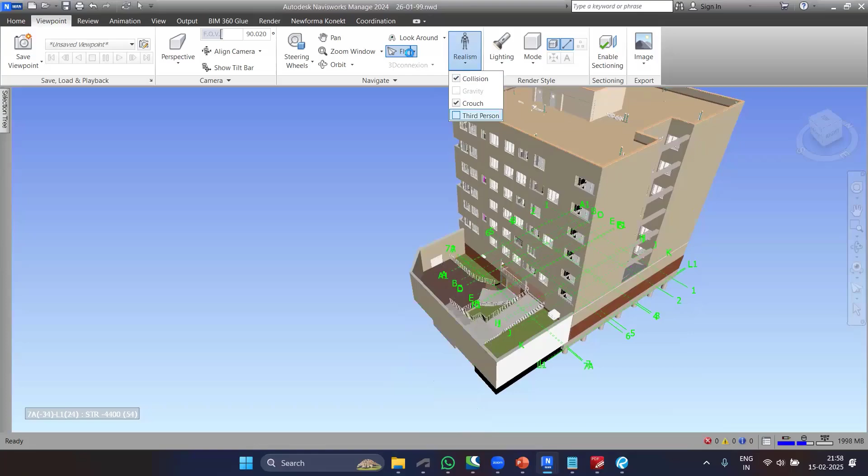There is collision, then there is a gravity tool. If I turn something off, gravity should appear. When I say gravity, this model won't go below the ground. It will understand the gravity, and it will also understand the collision, so it will not go through the wall. If there is a solid surface, it won't go inside it. So that is the 3D visualization or walkthrough that we can do. We can create custom tools, collaboration, issue tracking, real-time collaboration, cloud integration, which we can do using Navisworks.

Now, project reviews and reporting. We are reviewing the model anyway: when you are opening the model and doing something, you are reviewing it. For reporting, there are reporting tools from which you can create reports from Navisworks and submit them to the different disciplines. And you can customize the report templates. Currently I don't have any, but if I have any, I'll definitely show you during the sessions.

What are the benefits? Why should we use Navisworks? There is Revit, there are so many tools. In Revit itself, you can literally do the interference check. If there are some clashes going on, you can do it there. Why should we go for Navisworks? Why should we add one more software? Because it's not free software, it's paid software. Why should we go for this?

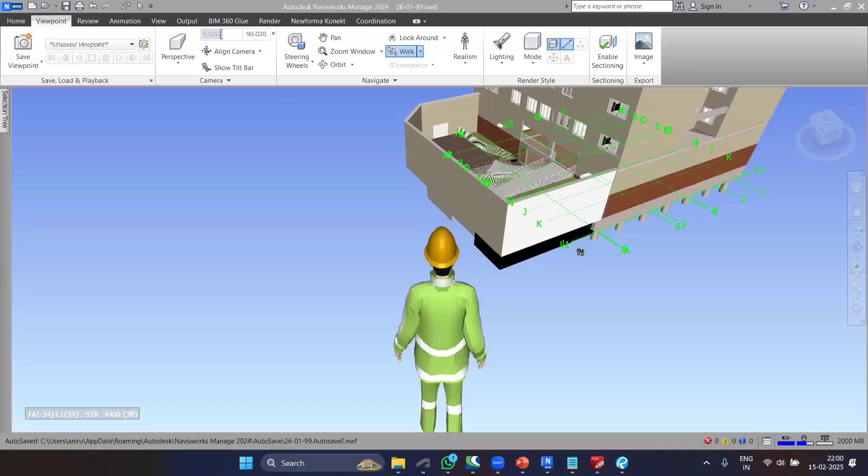First thing, that is enhanced coordination. In Revit, you can definitely coordinate all the models, but you can't go for particular clashes, and you can't combine the models. Why am I saying this? For example, this is a single model. Here I think you have two, three models. When I add five, six models into Revit itself, because I am using Revit, I am giving you the Revit example.

If I am using a five or six model in Revit itself, Revit gets literally very heavy. So most of the time we try to avoid it, we try to reduce the model, but it won't work. So the work is literally slow.

For modeling we are using Revit. For drawing, the sheet production or documentation, we are using Revit. But let's suppose we go for clash detection, Revit kills itself, it won't tolerate that. So for that, even though the models are heavy, it gives you NWC files, which is literally a lighter version of the 3D model, which you can use here. You can add the parameters and it's ready to use. That is one of the benefits of using this software.

Where we were... collaboration tools and then early clash detection. Yeah, definitely. When you are ready with the model, you give it for the clash detection before sending it to the client. That is literally a good thing you can do in Navisworks itself.

And better stakeholder communication for sure, because in my projects we do use it for this communication purpose. There is one guy who uses Navisworks, and we, all the other disciplines, give him the model. If there is some issue, he'll come back to us, show us the model, share the model, share the snip, share the comment, and literally we will solve that doubt at that point, and send us his revised file.

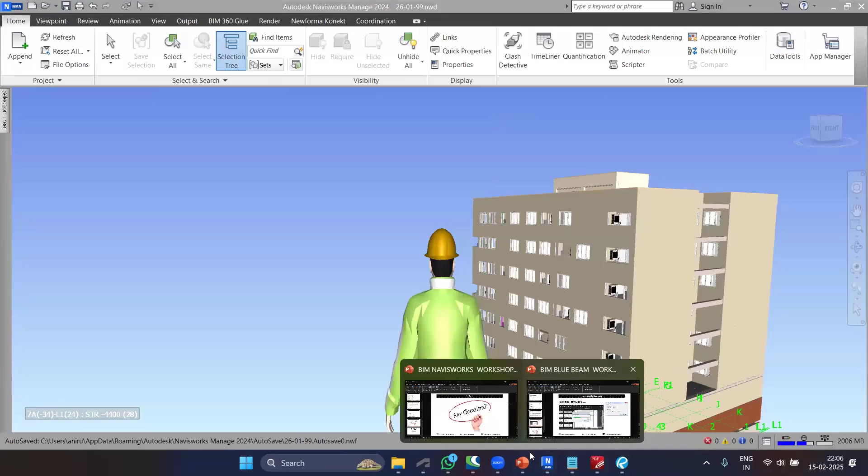Hello. I think we lost some energy. Hello, guys.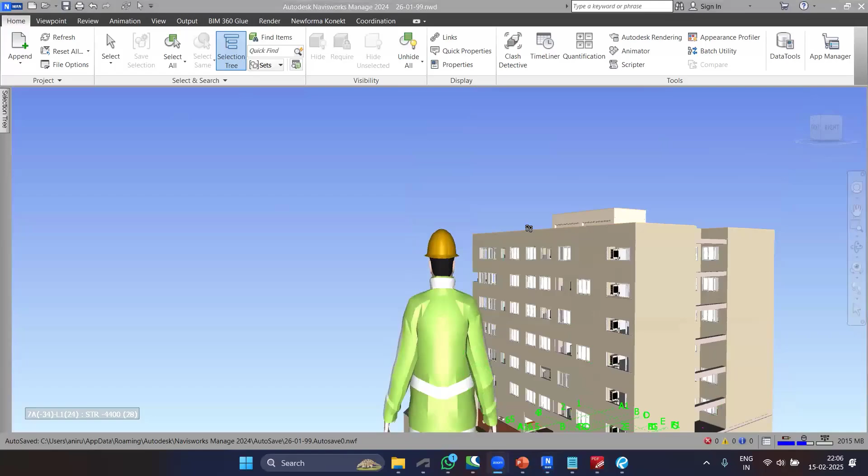So the walkthrough is when you are in the model itself, Anand. So you are in the model itself, and if you want to see the model by just going inside. Let me set up some view for me so it won't go up and down. Let me turn off my third person view for now. Let me, oh shit, I need to turn this off as well for now.

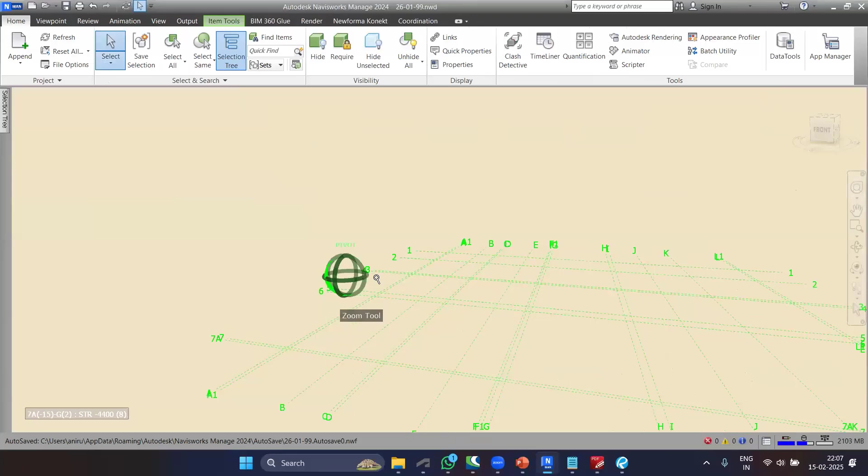Okay, let me select some element for now. Maybe this one, and I just want to orbit it. Okay, here we go.

Okay, here we go. So here we can drop our model. That is the third person view, and we can start doing the walkthrough. I can start this one, then I can start walking.

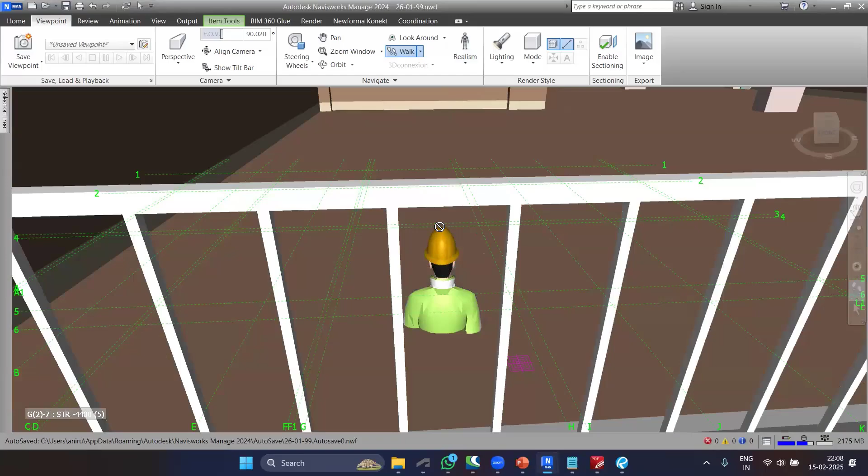You can see we are able to walk into the model. So now you can see it's literally going from here. If I turn on gravity and collision, oh sorry, and if I start, let me take it.

No, no, no, no, no, no. Let me take him back. I want to come back. Okay, and now if I want to go inside the model, see now it is not going up. He's not going through the window from here to there.

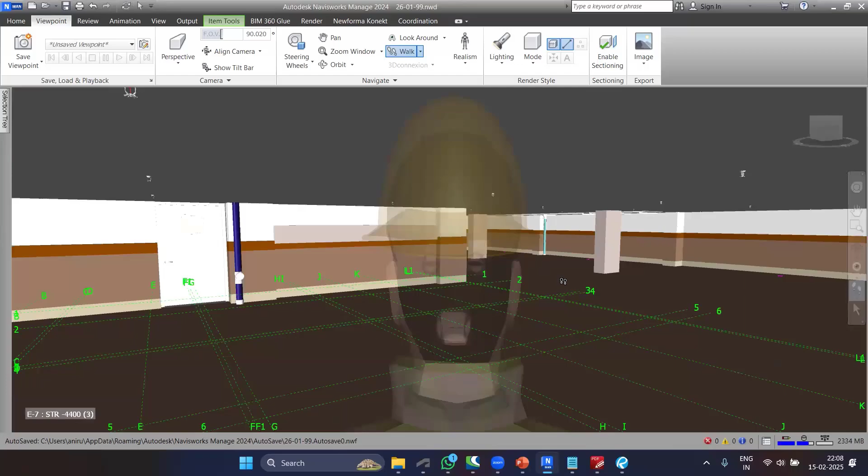So you can see you can go like an engineer literally, because it has a helmet, and you can see all of the clashes, or you can see that particular area. So it can walk, you can show, you can see around, you can see all of the stuff inside the model. So that's how you can create a walkthrough.

Or you can review the model. That's how it works. So yeah, Anand, that's how it works. It literally takes time. I'm not that into going inside it, it's just a tool.

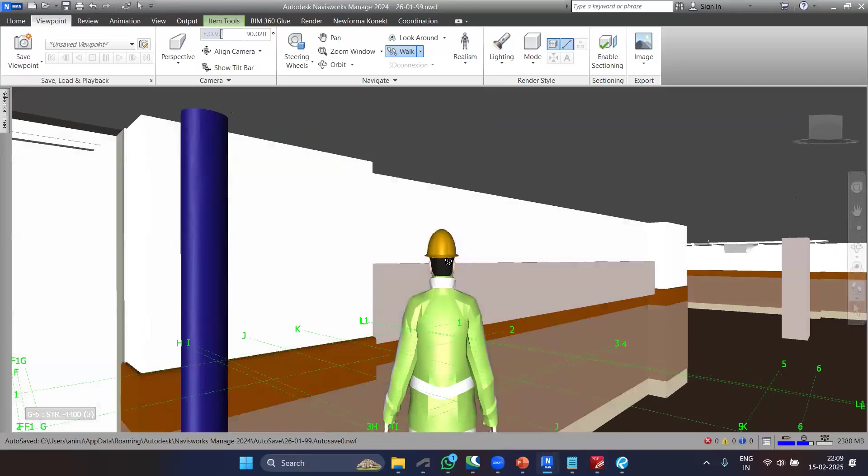So we are mostly the landscape people. We literally are on a road, so we don't need these things to work on. See, he is not going inside. But if I turn off this particular option, let's say collision, it starts to go like a Superman. See, it went. So we don't want to make him Superman though.

I don't want to go him inside and see things. So I usually keep this on. That's how it works, Anand. I hope it answered your question.

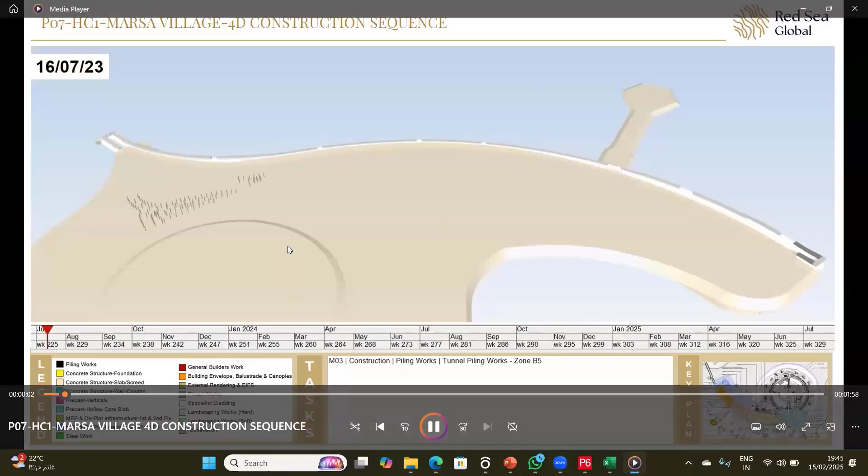You can see this is my tunnel and we are doing the piling works. The video is playing, right? Yes, sir. You can see in the bottom, these are the construction activities. That is integrated from Primavera with the software, and it becomes activity wise, and this cursor moves week by week, showing how the construction is going.

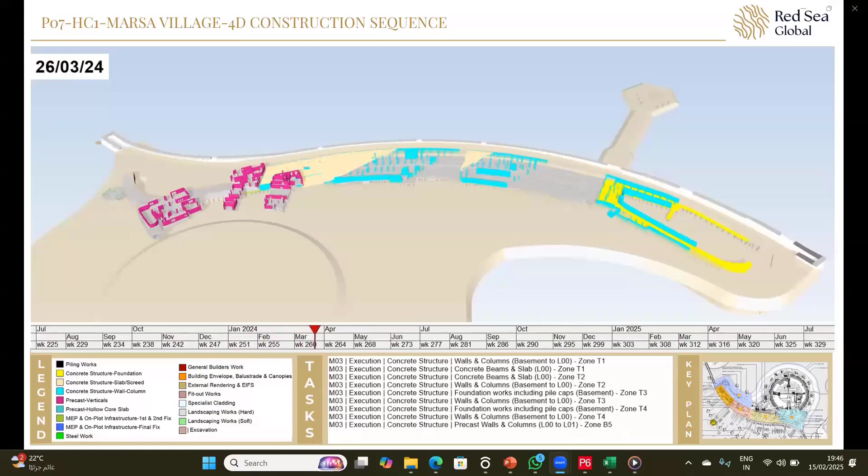So whatever the planning or meetings happening at site, high level meetings, I used to use these videos to show how our progress is going at site, so that people who are not having experience in construction can also easily understand because of these video representations. And you can see how these buildings are growing up in these areas.